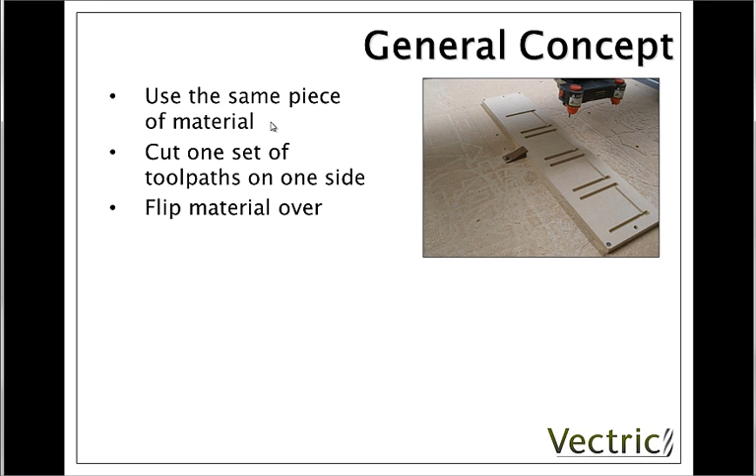So let's start here by looking at the general concept of doing two-sided machining. The idea of this is to use the same piece of material. What we're going to do is create a set of toolpaths and cut those on one side of the material. Then we're going to take the material off the machine, we're going to flip it over, and then we'll have another set of toolpaths that we're going to cut on the other side of the material. And as you can imagine, this can be used for creating all sorts of effects.

In this case, what we're doing is effectively cutting the jointing for our box on one side, and then cutting the decoration and the overall profile on the other side. That gives us the ability to have this decorative box, but also to have these joints on the back so that we can assemble it accurately. There are many other different applications for this as well. The key part of this is it is essential to have exact alignment between the top and the bottom when you flip the part over for this to work correctly.

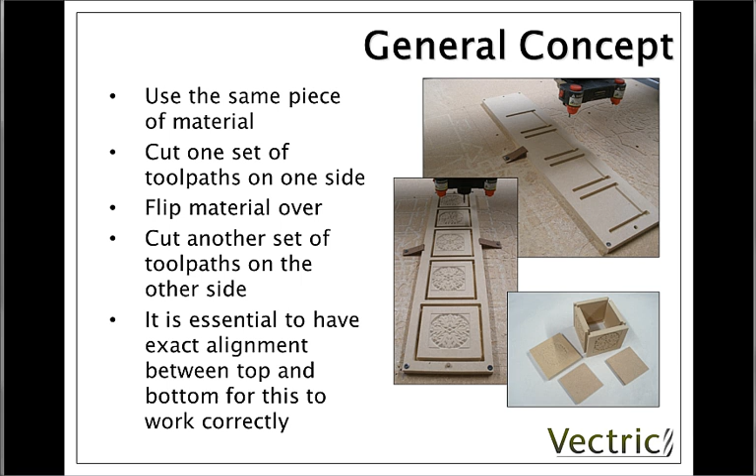This specific example we're going to show you could be done with VCarve Pro or Aspire. There's also a separate tutorial video if you are running the Aspire software so that you can review how to do two-sided machining with a 3D model.

So as we already mentioned, the absolute key to making this process work is getting the correct alignment between the top side and the bottom side when we cut the two sets of toolpaths. In terms of aligning your X and Y, the typical process is going to be to start by laying out the vectors for one side of the part. It doesn't really matter whether it's the front or the back first. Typically, I think most people would probably start by designing the front though, as that's going to probably control most of your overall design.

Within that, you're probably going to include some special information. For instance, you may have some dowel hole locations which we're going to drill, and we'll discuss those more in a moment. Next, you're going to make a copy of the file. So you'd lay out your front or your back, you'd save that, you'd then make a copy of the file in effect, and then edit the design, starting by mirroring the entire set of vectors, and that's going to emulate the fact we're going to flip over the material.

When we do this mirroring, make sure you use the option to flip about job center, and also you need to make a note of the direction that you mirror the vectors, whether you mirror them vertically or horizontally. As many parts are symmetrical, sometimes it can be helpful to add some text or a corner location indicator, maybe a vector in one of the corners, and that will help you to ensure you've mirrored the parts as you intended. It will give you an instant read basically of whether you've mirrored parts horizontally or vertically. Anything you can do to give yourself these sort of indicators along the way reduces the chance of making an error.

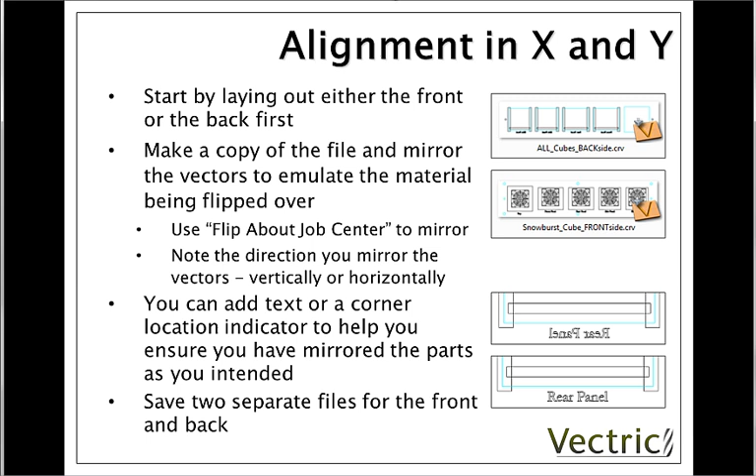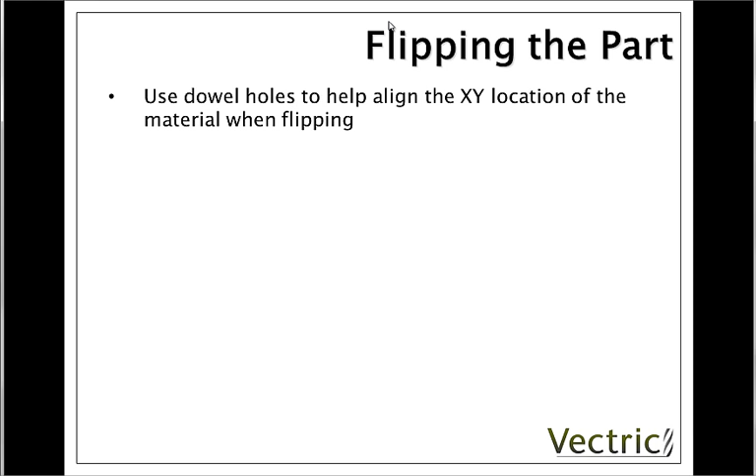So this is the virtual setup. From this we're going to calculate the toolpaths, but how does this relate to what we physically do on the machine? Basically, we're going to use these dowel holes to help us align the XY location of the material when we flip, so that between the front and the back, those dowels are in the same place, and that should ensure that our toolpaths are all going to be machined in the right orientation relative top and bottom.

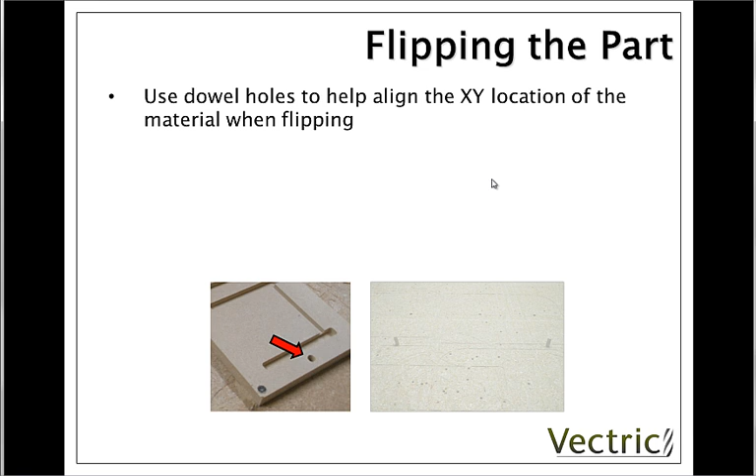So here we can see on one side we've drilled this dowel hole. We'll talk in a moment about the options that you've got for this, whether you can machine all the way through or machine partly through. And then in the machine bed, in the sacrifice sheet on the table, you can have the same holes that you've drilled through, or you'll drill new holes and insert these dowels so that as this part is taken off it can be flipped and located in that same position.

We talked about really that there are sort of two options for how you might want to go about drilling these dowel holes and placing the dowels in the sacrifice sheet. First option is to drill all the way through your material into the spoil board and use the same XY position for both sets of toolpaths.

So you'll drill all the way through when you machine the first side, then you'll be able to take the material off, flip it, put two dowels into the holes that you drilled into the table, relocate your material on there, secure it so that it's attached to the table, and then you should be able to run the second set of toolpaths using the same XY location that you had when you ran the other side.

There are some limitations with this method. First of all, you need to make sure you've got a tool that's long enough to drill all the way through your material and deep enough into the sacrifice sheet on the machine bed in order to locate the new dowels. Second, you'd need to ensure that you were really cutting the two sets of toolpaths without a break in sessions of cutting, so that you'd need to maintain your XY0 position in the same place when you flip the part over.

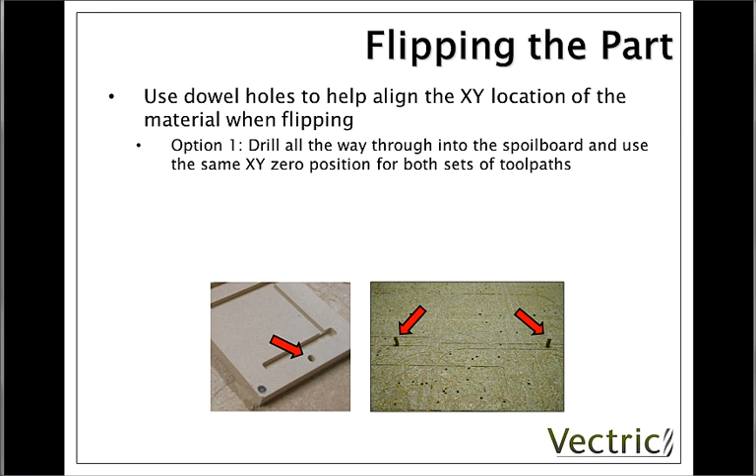If you had a situation where that maybe wasn't possible, maybe it was a very long cut and so you'd like to cut the second side the next day, you might consider option 2. Option 2 would be to drill partially through the first side, and then when you come to flip it over, what you're going to do is drill these holes into the machine bed as a new toolpath. So all you'd do is you'd relocate the machine in whatever XY position you wanted, so you could come back the next day for instance.

The first operation would be to drill those two holes so you'd know that they were in the same distance and placement. Then you'd be able to insert your dowels. Now you could put your flipped piece of material in the right place and the XY0 location should be correct to execute your toolpaths.

If your CNC doesn't have a sacrificial board on the bed of the machine, then you aren't going to want to drill holes in it and therefore this dowel method wouldn't work for you. An alternate idea would be to use a jig to hold the part in place when you machine the top or the bottom, and then after you flip it to hold the opposite corner in place when you machine the other side.

If you were going to do this, you'd need to make sure that your material was pre-sized very accurately and was symmetrical in size around the size of the part that you were making within the software. That's the only way you're going to ensure that when you flip it and put the opposite corner in the jig, that everything is going to be located in the correct orientation between the top and the bottom of the material.

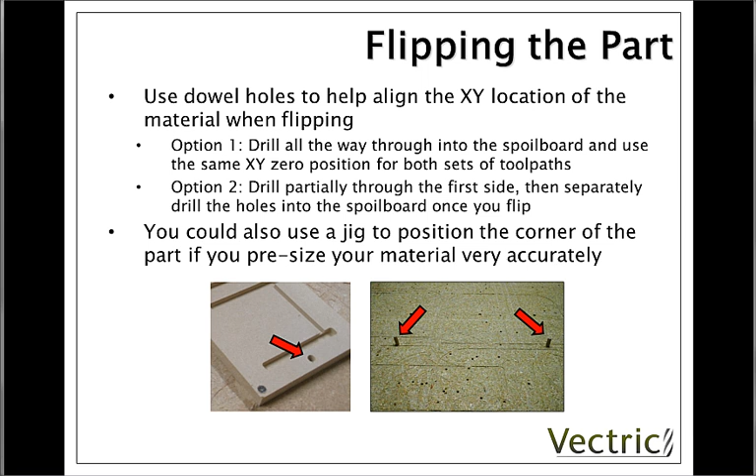As with the XY alignment, there are many methods that you could use to get accurate registration in the vertical axis or the Z-axis when you're flipping the part from the front to the back or vice versa. The key to this is making sure that the depths of cut that you're going to use on one side of the part are going to be in the right relative vertical position to the depths of cut that you're going to use on the other side of the part.

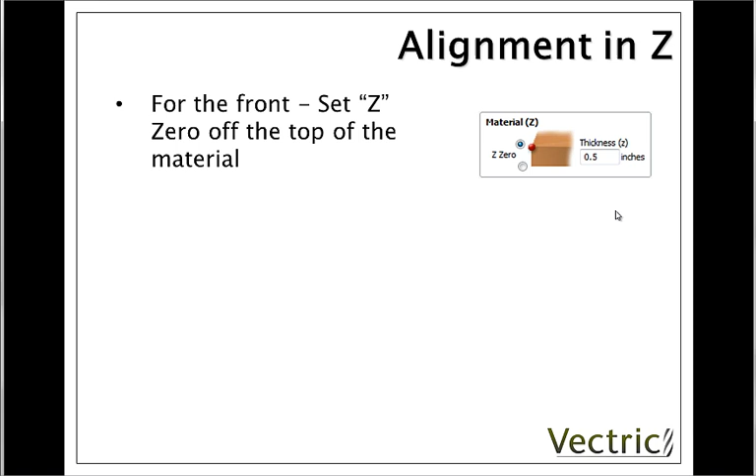What this means is that physically we're always referencing the same face of the material, whether we're cutting the front or the back. When we're cutting the front, it's going to be on the top. As we flip it over, that face will then be against the machine bed, and so that's why we set the Z0 off the machine bed when we're cutting the back.

While doing this will help you minimize some of the complications you might get with having varying thickness of material, it's still really good practice to try and make sure that your material is even thickness and that you measure it and have it set up very accurately within the software itself and reference exactly on the machine tool too. So it's also important to make sure, as with all toolpaths, that you're going to set your Z0 very accurately, whether it's off the top of the material or whether it's off the machine bed.

So there we've covered the sort of theory behind two-sided machining and some of the techniques that we use that we think will help you to get good results when doing this. Let's now go into the software and take a look at a couple of files that have been set up for two-sided machining so you can see some of these ideas in practice.

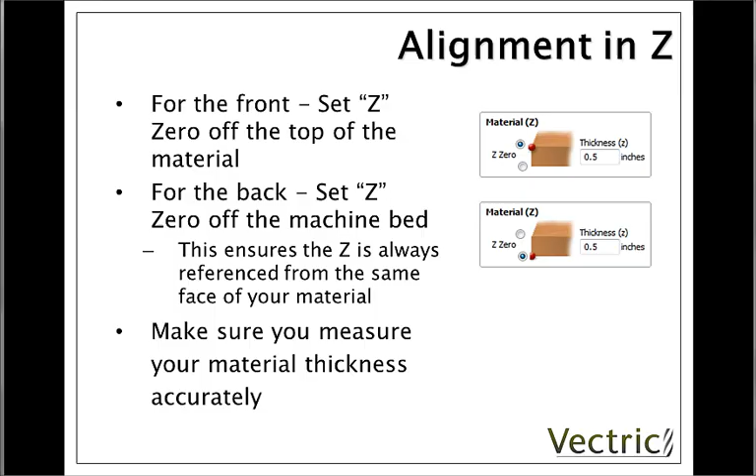So let's click on the option to open an existing file, and you can see that in the folder for this particular project there's a selection of CRV files which we can open in the software. There's also a PDF. The PDF is the documentation for this particular project as it was originally designed as a free download from the Vectric website. So if you want to, you can take a look at that PDF and see how the part can be put together, how it might be finished, and all the other information that Michael Tyler put together for this particular project. Here though, we're just going to take a look at some of the design files themselves.

And you'll see there's actually 3 different designs for the front. There's one called Dot Cube, Snowburst and Swirl 1. We're going to open the file called Snowburst Cube_front side.crv. So let's select that and hit open. So here you can see the vectors have been laid out for the 5 sides of the cube that are going to have decoration machined into them, or as we're thinking of it, the front side of our piece of material.

Now some key elements to this, first of all, is this circle here and this circle here. These are going to represent the dowel hole locations that we're going to use for accurately aligning the part when we flip front to back. Also, you'll notice that there's some text in here. Now the text has been added as a help so that you can see which of these parts corresponds to which particular part of the cube when you do the assembly, but also these will be a really good indicator when we do our mirroring as to whether we've mirrored the part horizontally or vertically.

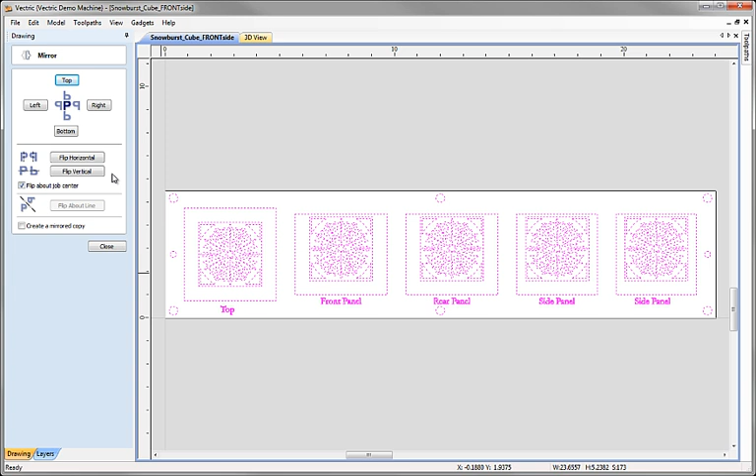Then it's just a case of choosing whether I intend to flip my material horizontally, so left to right in effect, or whether I intend to flip it top to bottom or vertically. You just need to make sure you make a note of whichever choice you make. In this case I'm going to flip left to right, horizontally or along the x-axis, depending how you want to think of it. So I'm going to click on the button here, flip horizontal.

What's nice about having the text in the design here is I can immediately see which direction I flipped this in. If I'd flipped vertical, the text would now be upside down. It would also be at the top of the part as well. When we use this option to flip about job center, we do so because it means it doesn't matter whether the part we've designed is symmetrical or not.

However, to make this work correctly, what you do need to make sure is that the dowel holes are going to be symmetrical around the middle of your part, or around this line that we've told the software that we're going to mirror this design over. To do that, when I laid out the vectors for those dowel holes, what I would do is draw one hole either on the left or the right or top or bottom, whichever direction I'm choosing to flip this in, and then I would use the same mirror function to create the one on the opposite side.

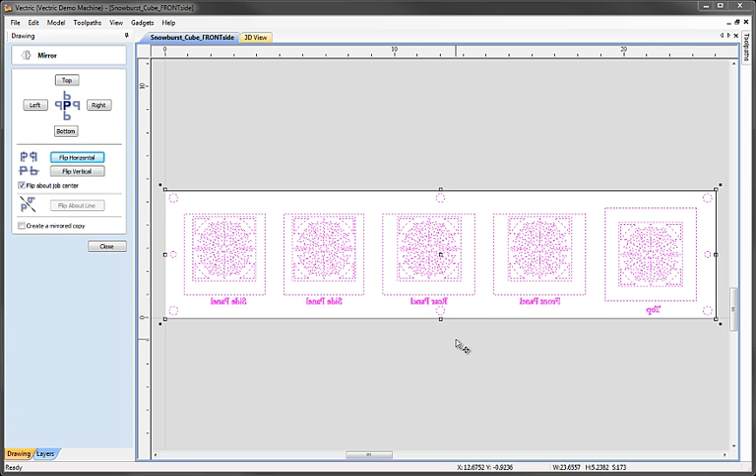So I'd select the dowel hole, come into the mirror function, flip about job center, and choose the appropriate option for horizontal or vertical, and that would ensure that my two dowel holes would be exactly symmetrical around the middle of the part. Therefore, I no longer need to worry about how my actual objects within the design are going to be created or positioned, because I know I should get the correct registration. Let's go ahead now and close the mirror function here.

So once we've done our mirroring of the part, we've effectively created the template for what in this case is going to be the back side of our job. So the first thing you should do is always come up, go to File, Save As, and change the name of the file. In this case you'd call it back or something like that in order to differentiate it. Then you would go ahead and make changes to the design to create whichever vectors you need to control the toolpaths you wanted to machine from the back side of your piece of material.

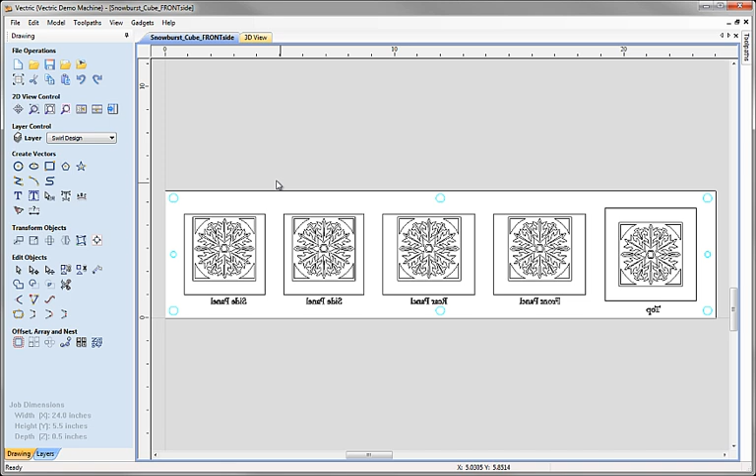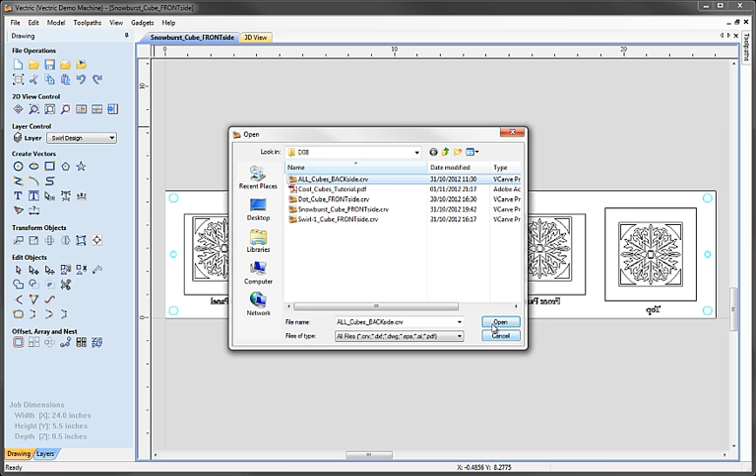In this case I'm going to go ahead and open the file that's been created for that. So I'm going to come up, click on Open, choose All Cubes Backside.crv. So although we've got three different designs for the front, they all use the same set of toolpaths for the back in order to cut the slots that we're going to use for assembly. So we'll choose All Cubes Backside, hit Open. I don't want to save that file that we were just working with there.

So within the file here you can see that Michael has created some rectangles that we're going to use to calculate the toolpaths from this side. We've still got our circles that represent the dowel holes that we're going to drill through the part. And also for reference, Michael has got the outlines of each of the panels. Now from the back side, these are not going to be toolpathed or cut out, but from a design point of view it's very useful to be able to see those in order to accurately lay out where these slots are going to be machined.

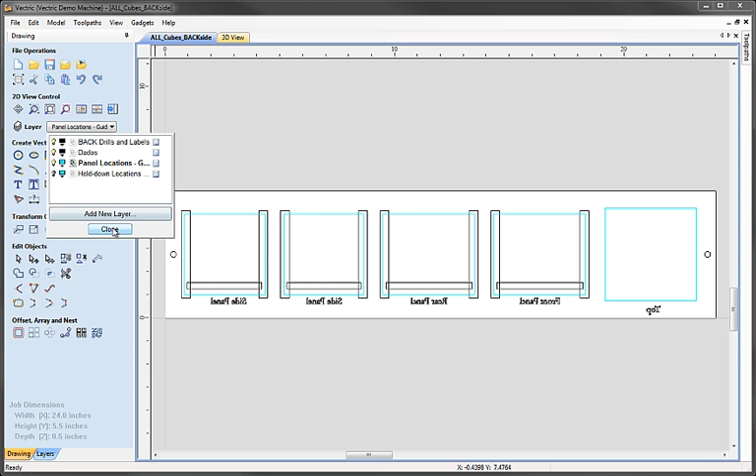And these are coloured blue, controlled by the layer that they're on. So if I click the down arrow here, you can see in the layer list that the layer that those particular vectors are on is coloured blue here. We could change that colour to something else if we wanted. And changing the colours of things on different layers can just make it a little bit easier to visualise them in the 2D view, but also to make sure that you don't select anything, in this case that's blue, in order to calculate a toolpath on it.

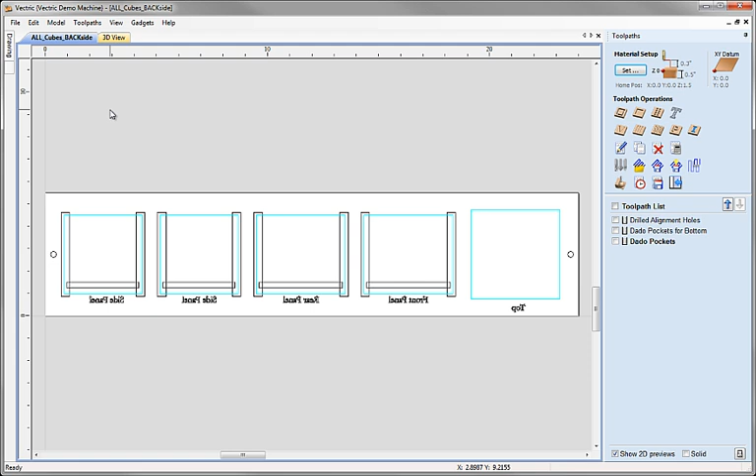Now for this particular example, Michael did choose to cut the toolpaths for the back first. So let's take a look at those toolpaths that were calculated for this job. I'm going to switch over to the Toolpaths tab. I'm going to go up to View, Tile the windows horizontal, so we can see the 2D view and the 3D view at the bottom here. We can see this has already got the toolpaths calculated for it.

Got the alignment holes, so here we can see that that's drilling the dowel holes for us. If we double click on this, we can see it's going way past the material thickness. Material thickness is 1/2 inch. It's going to machine an additional 1/4 inch into the sacrifice sheet underneath this, and that'll leave us with the hole positions that we'd insert the dowels in when we'd remove the material and as we were flipping it to reposition it on the bed of the machine.

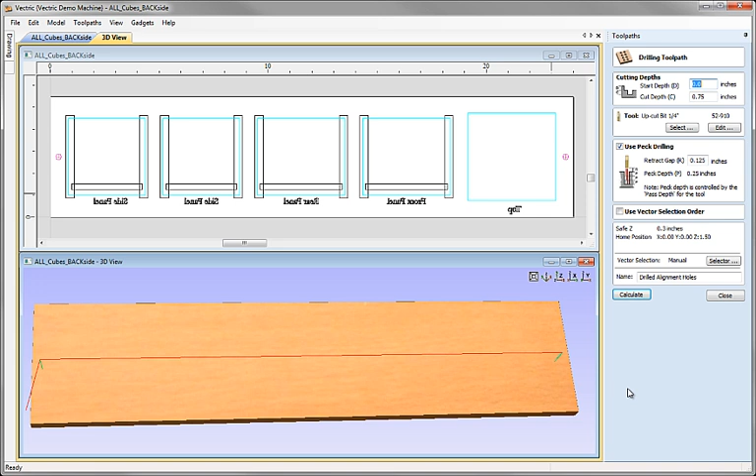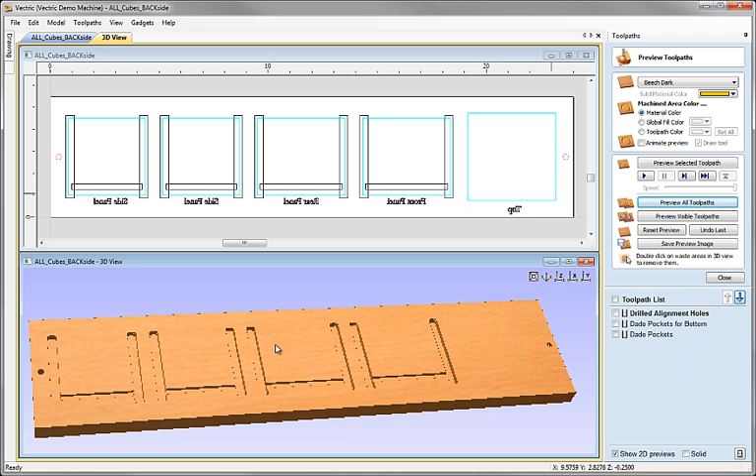Then we've got the pockets for the different depths of dado here. These are the slots that we're going to machine in order to allow us to assemble these different pieces together. If we want, we can go ahead and preview these. I'm just going to say preview all toolpaths, and then we can see those being cut. We can just maximize the 3D view to take a closer look if we want. So this would be the back side of the part. If we were happy with this, we could hit close and save these and output them using an appropriate post processor for our machine, and we'd be ready to take those over to the CNC machine and cut them.

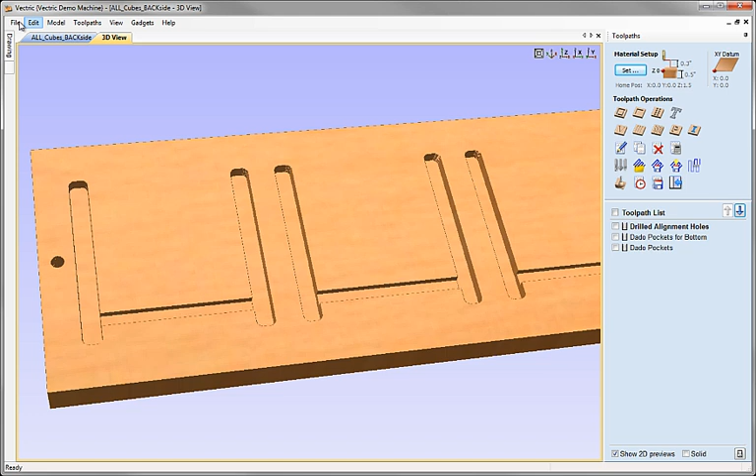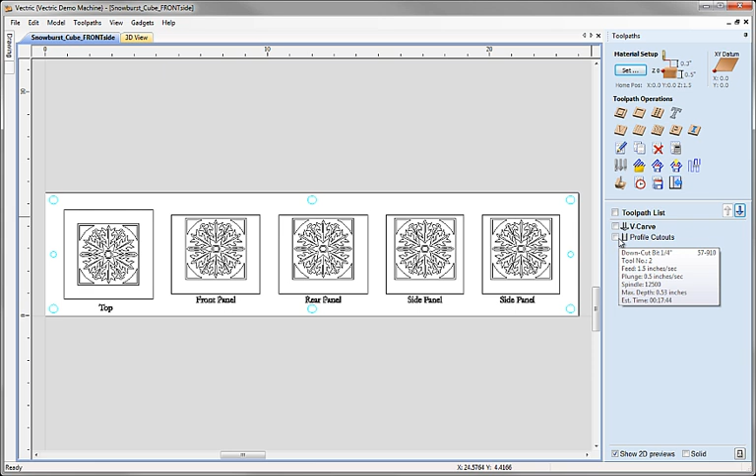Let's go back to the front side now. So I'm just going to close this and also open an existing file. We'll open the one that's got the snowburst design on it. As I say, there's 3 different variations to this, plus you could make your own as well. If we hit open here, click on the icon to go across to the Toolpaths tab, we can see in this case we have a V-carve toolpath and a profile cutout. If I go up to View, Tile the windows horizontal again, we may want to draw those toolpaths in the 3D view. There we can see how they're going to work.

On the surface of the material we're doing the V-carving, and then the way Michael has set these toolpaths up, it's taking a long ramp down into the part and then cutting them out. And we can see if we look carefully that there are some tabs on these profiles in order to hold the part in place as they're being cut out. So that will leave small pieces of material connecting each part to the original piece of stock that it's being cut from.

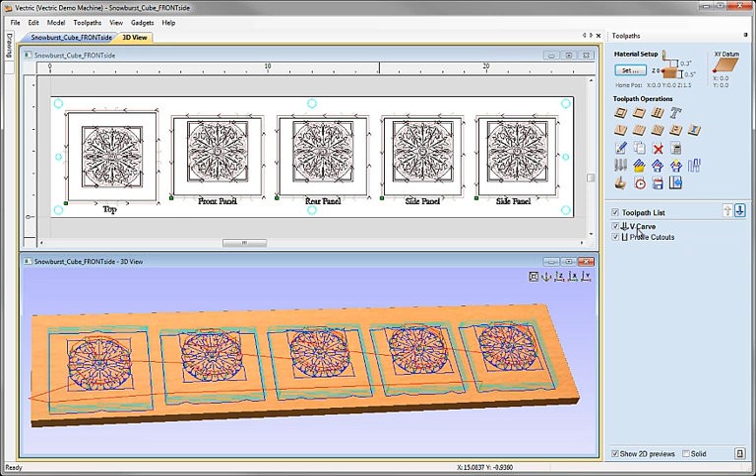So we could go ahead and preview these. Let's select the V-carve toolpath, click on the preview icon, preview selected toolpath. So there's our V-carving, adding our snowflake decoration there. Then second, the profile cutout, can preview that, and there we can see how that's going to look. Let's maximize the 3D view.

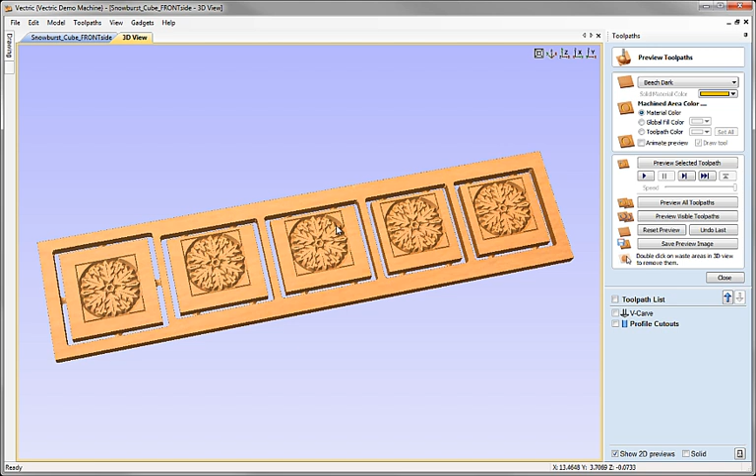Now, if we've accurately positioned this, then we know that when those profiles are cut out, they're going to be in the same position as those blue vector outlines were when we were in the orientation where we were looking at the back of the part. And so when we manually then remove these from the material, those slots, the dados that we cut in there, should all work and align perfectly with the other objects to allow us to assemble this. So this is just one example where we could use two-sided machining to create a part on a CNC. There are lots of other applications that you can use this methodology for, especially when you get into doing 3D work with a product like Aspire.

When you first look at two-sided machining, it can appear to be quite complex and like it would be hard to get good results with it. But if you try it, you'll probably find that it's much easier than it appears to be. And the real key is just making sure that you can relate the virtual alignment in the software with the physical alignment on the machine. And hopefully within this presentation we've given you some good ideas and techniques that you can use to achieve that.

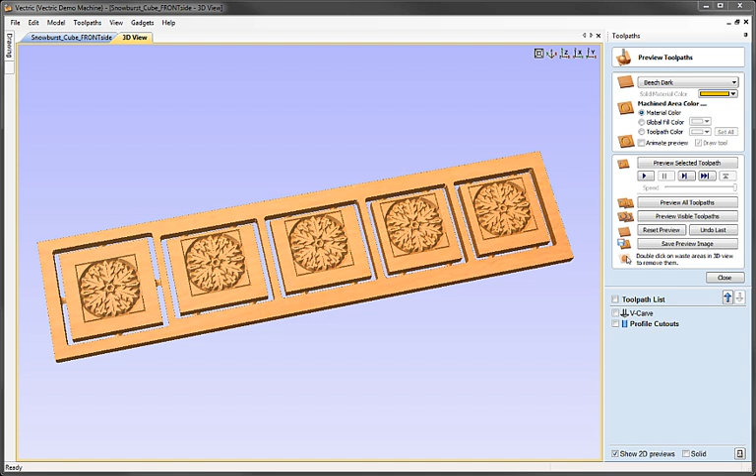One nice thing with understanding this process is the fact that you can use the same set of steps whether you're making something simple or something much more complicated. The same concepts and process are always going to apply when you're flipping the parts, just to ensure that you're getting that alignment in the X, the Y and the Z axis. And mastering the art of two-sided machining will certainly add a great deal of flexibility even to a standard 3-axis CNC machine. And that concludes this tutorial.